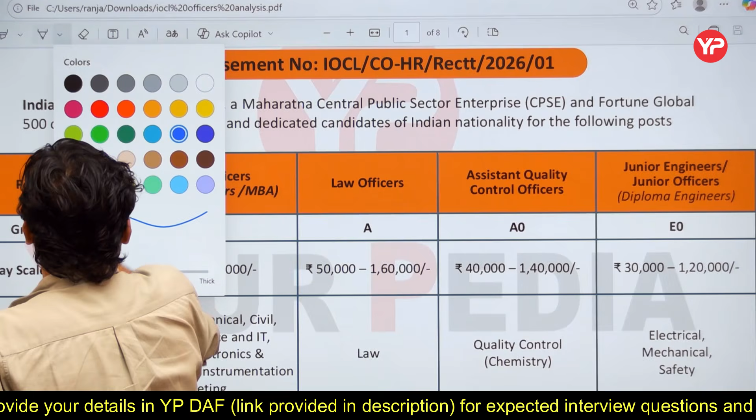I am getting one question a lot from various sources - WhatsApp, Telegram, Instagram, YouTube comment section. Sir, in the mechanical segment, what type of question can I expect in the officer post? For the officer post, I want to make sure this video is only for the officer post. I will make a separate video for the diploma level exam, that is the JEO post. So this video is dedicated to the engineer officer, the graduate engineer segment - that's what I will discuss here.

First question - hopefully most of the seats will be expected in the mechanical segment, so you have better chances this time, all of you have better chances. Last year there were more vacancies for chemical, but this time it's for mechanical. Could be, I think it could be.

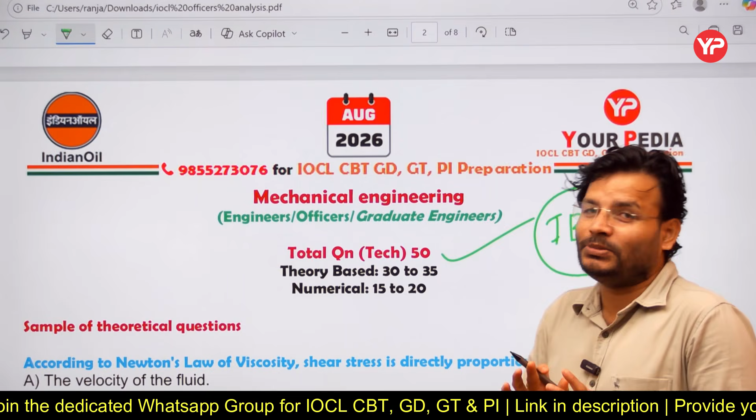I will give the list of 5 most important subjects for mechanical engineers that you have to deal with. So here you can see the total number of technical questions - there will be 50 questions. It is clearly mentioned 50 questions, out of which, talking about IBPS officer post, you can expect at least 15 to 20 numerical questions, and 30 to 35 theory-based questions.

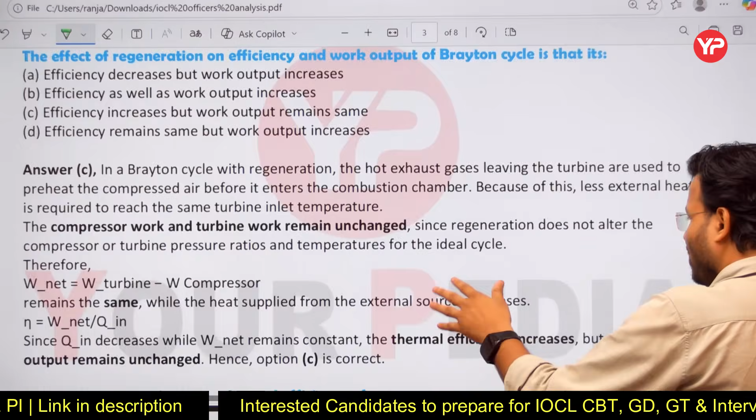Now a student can ask, sir, what kind of question comes in theory-based, and what type of question comes in numerical-based? That's why I have come here with some sample questions - some questions that have been asked before in the IOCL officer post. I have taken a few questions, and on that basis I will show what different types of questions they can frame on the numerical part as well as the theoretical part - I am going to show you all of this, how to do it.

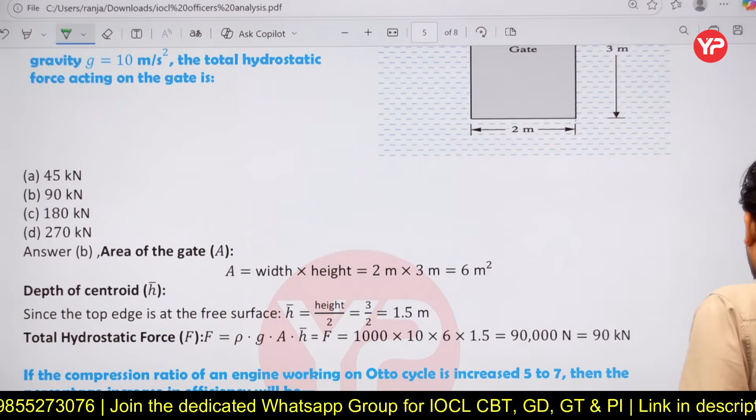And yes, since you have approximately 1.5 months left, how should you prepare for that exam, and most importantly, how can Yourpedia help you? So I am showing you all these questions - how they came in the HPCL officer exam, and how they can come in yours, right?

As I told you, 30 to 35 questions will be totally theoretical based, and 15 to 20 questions will be numerical.

Now the question is which type of theoretical questions they can ask. If you talk about the difficulty level of theoretical questions, that will be moderate to difficult, or some questions will be easy. Obviously out of 30-35 questions, you can expect 5 to 7 questions to be very easy. After that, moderate and tough questions will be there.

I am not talking about the numerical part here, I will talk about that separately. So here the theoretical question that comes under the category of easy question, like 'According to Newton's law of viscosity, shear stress is directly proportional to', and you have some options. This is an easy question, which you can see falls in the easy category.

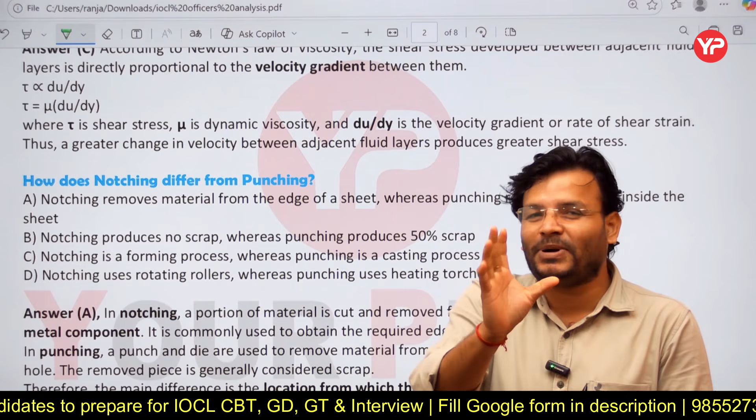Now yes, I have given the answer, I am not going to explain right now. That is another question: area under the TS diagram. That is again a very easy question. All the students can give the answer.

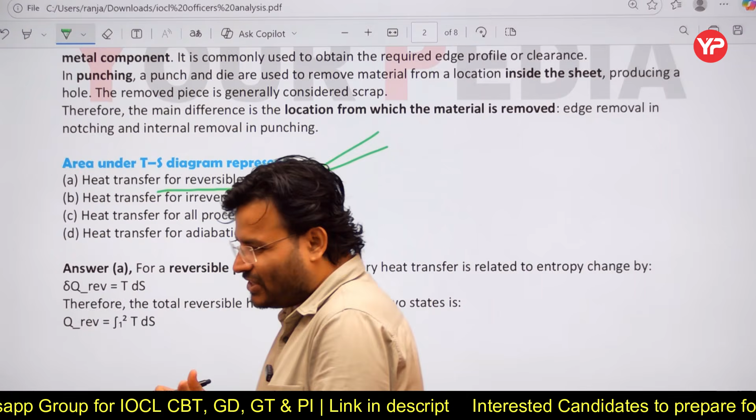Right, okay, I will come on that.

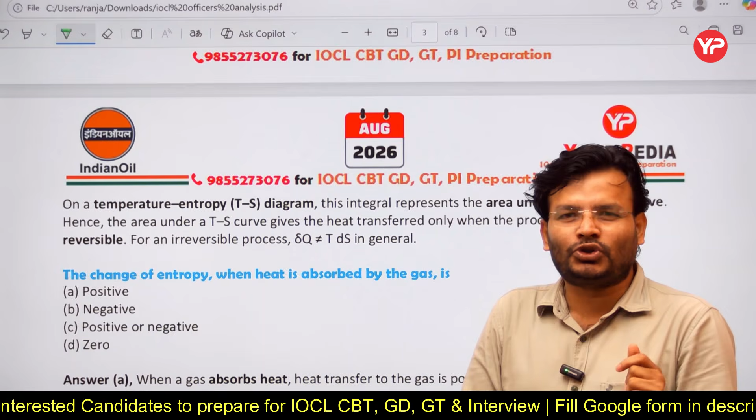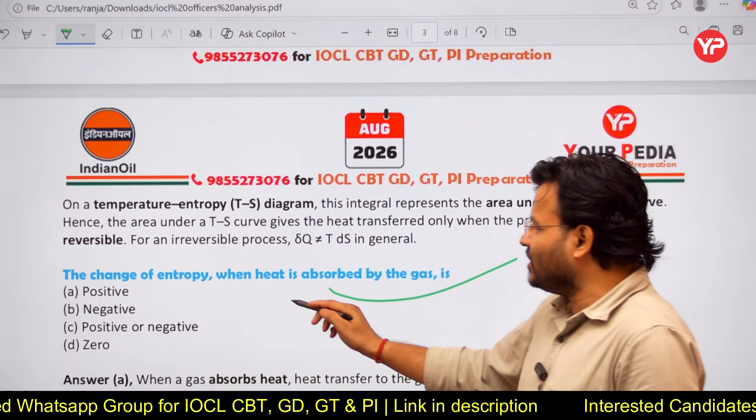This is the next question. The change in entropy when heat is absorbed by the gas. Simple question, that is another simple question we can say.

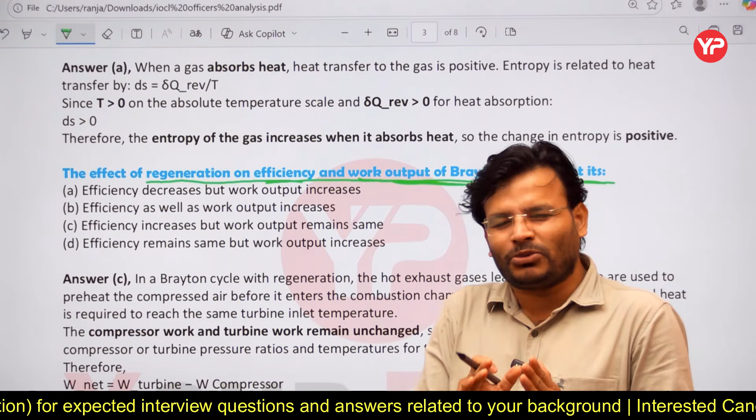So theoretical questions mostly we can see as easy to moderate, and yes, some tougher questions they may ask, some difficult, some light. Out of 35 questions you can expect 7 to 8 questions which will be very tough. Tougher means multiple concepts could be involved there, and you have to go much more deeper in the subject, right?

Here I have given, this is the next question.

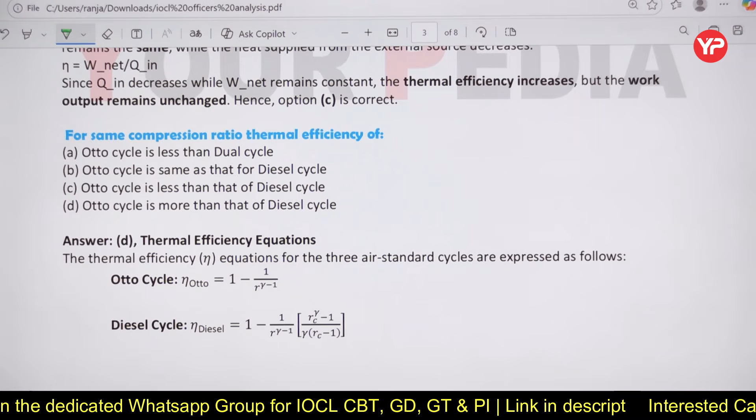For same compression ratio, the thermal efficiency, you have given some options, right? That is the kind of theoretical question you can expect. Now the question is the numerical type of question, and that plays a crucial role in your selection.

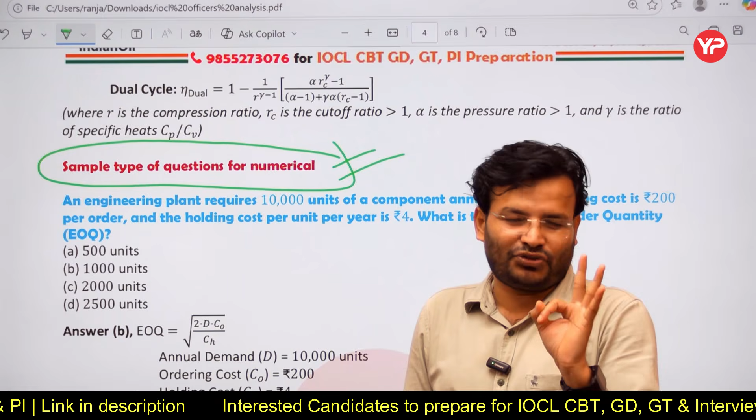So numerical segment can be of 3 types of questions they can frame. As I asked students, as I discussed with several students who appeared in the IOCL officer post, according to that I am going to give some conclusions here.

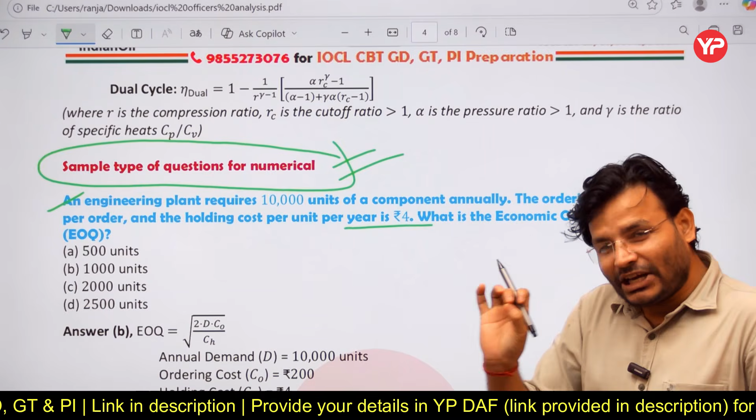One type of question, my dear friends, is like: an engineering plant required 10,000 units for a component annually, and the ordering cost is given and the holding cost is given. What is the economic order quantity? That is again numerical, but called easy numerical - you don't have to do anything, just substitute the value in the formula and you will be able to answer. That is an easy type numerical, and all of you can do it, I think.

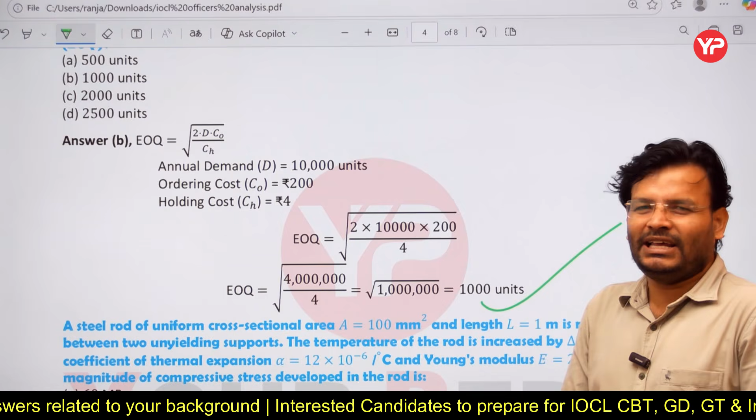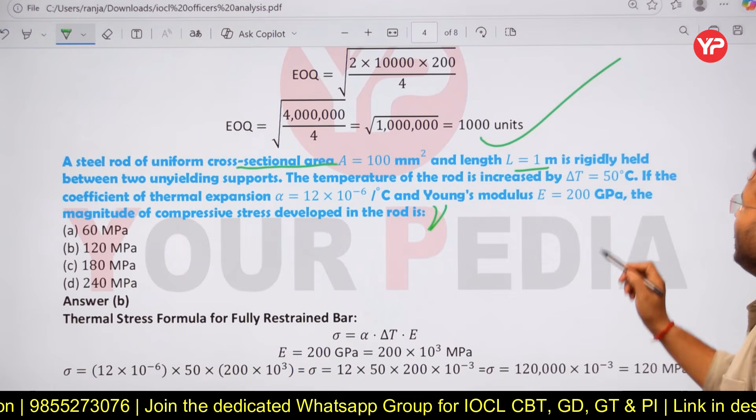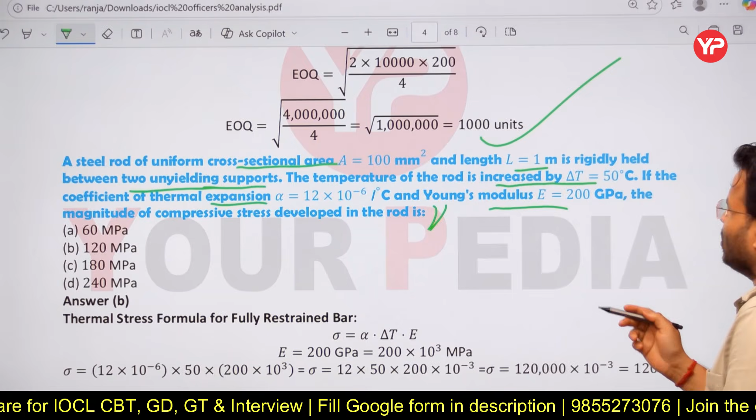Now if you talk about another type of question, that is again easy type. A steel rod of uniform cross-section area is given, length is given, is rigidly held between two unyielding supports. The temperature of the rod is increased by delta T. If the coefficient of thermal expansion alpha is known, Young's modulus of elasticity is known, the magnitude of compressive stress developed in the rod - thermal stress is E alpha delta T.

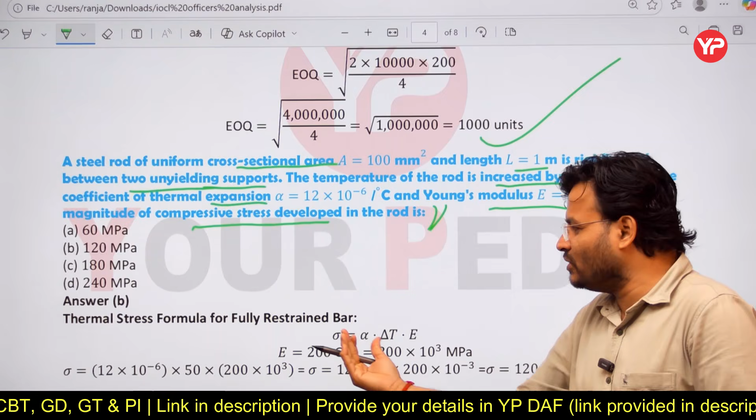Again that is an easy type of question, in which what you have to do is just put the given value in the formula, and with a little good calculation you will get the answer easily. By solving that we will get 120 here. Now come to another type of question.

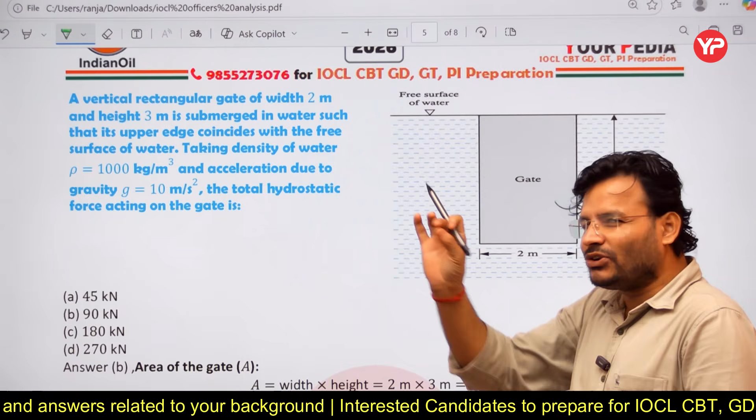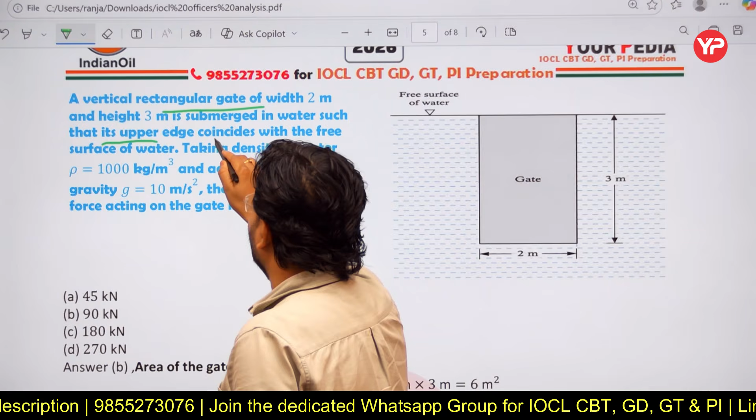This is again a question which comes under the category of easy to moderate. A vertical rectangular gate of width 2 meter and height 3 meter is submerged in water such that its upper edge coincides with the free surface of the water. Taking density of water as 1000 kg per meter cube, acceleration due to gravity given, the total hydrostatic force acting on the gate is rho g h bar - put the value and you will get the answer.

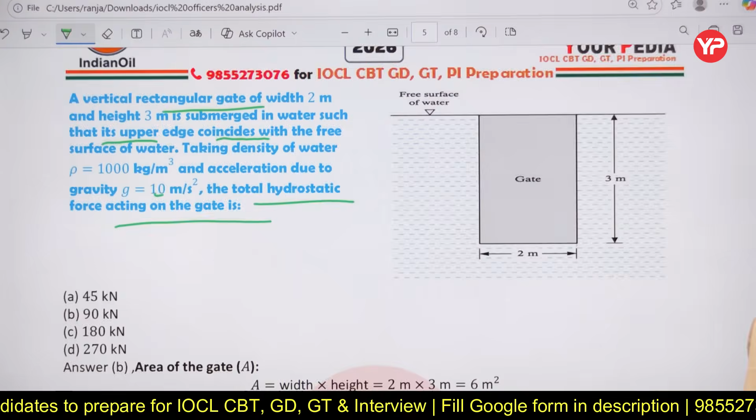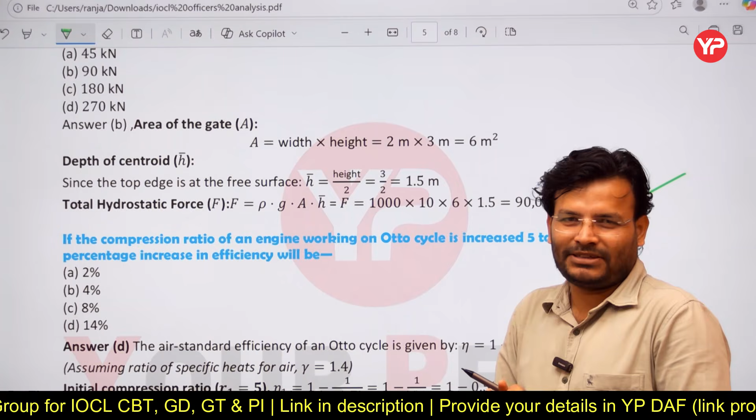So those were the few questions which have been asked by IOCL, based on memory - a little data could be changed, but the question language and everything was like that. Now come to another type of question, next type.

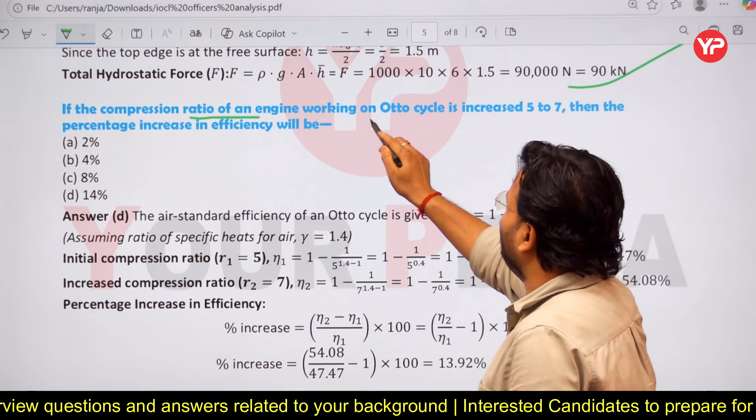What is the next type of question? Now see this question, my dear friends. In the compression, if the compression ratio of an engine working on Otto cycle is increased from 5 to 7, then what will be the percentage increase in the efficiency? Which type of question do you think this is, my dear friends?

I know you remember the efficiency formula for the Otto cycle - 1 minus 1 upon r to the power gamma minus 1. But now the question is, can you calculate 5 to the power 1.4 minus 1? So it becomes 1 minus 1 upon 5 to the power 0.4. Now tell me, do you think you are able to solve that value without a calculator? Obviously no, right? So it will be difficult.

Suppose in the numerical, if this value is not given here, then how are you able to solve that question? Obviously you will not be able to solve that type of question, right?

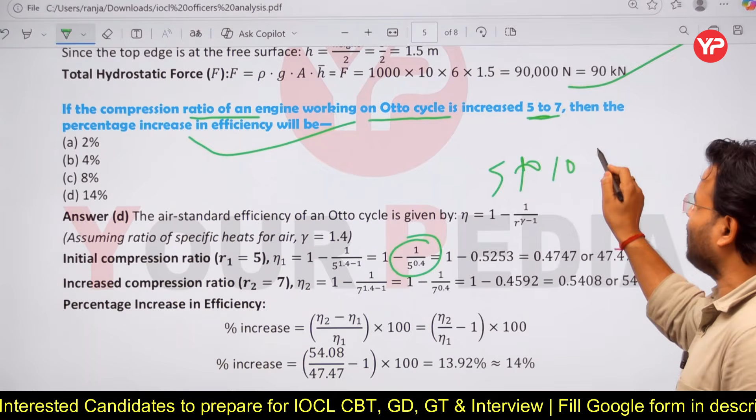What you have to do - I'm telling you that type of question is only 5 to 10% of questions coming like that. In that time, either you practice a lot or otherwise you can leave that type of question. 5 to the power 0.4 is very difficult to calculate, it will take a lot of time, so you can leave that question.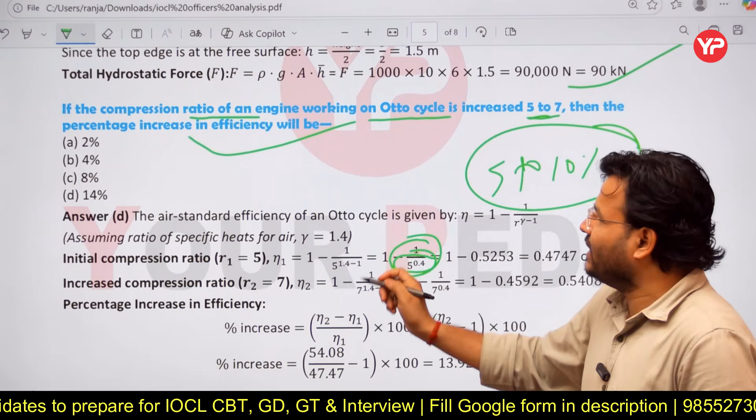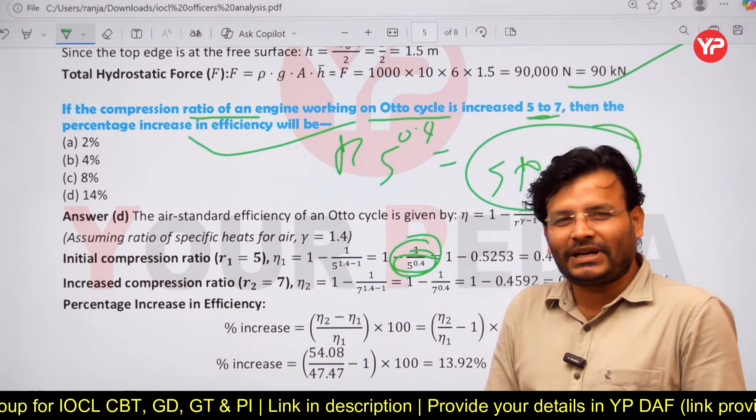How am I able to solve that question? Suppose in the data, if they give the value of 5 to the power 0.4, then I think it will be a little easier. Otherwise in that scenario, not even a single student can solve it. Okay, unless someone makes a lucky guess - that's different.

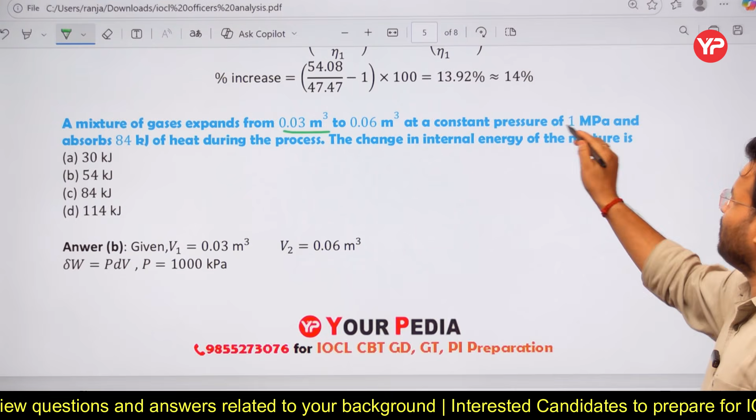Now see another question. A mixture of gas expands from 0.03 meter cube to 0.06 meter cube at a constant pressure of 1 megapascal, absorbing 84 kilojoule of heat during the process. Find the change in internal energy of the mixture. That is again an easy question - dq equals du plus dw. On that concept you have to solve it, and easily you are able to solve it. So just see, this is that type of easy question.

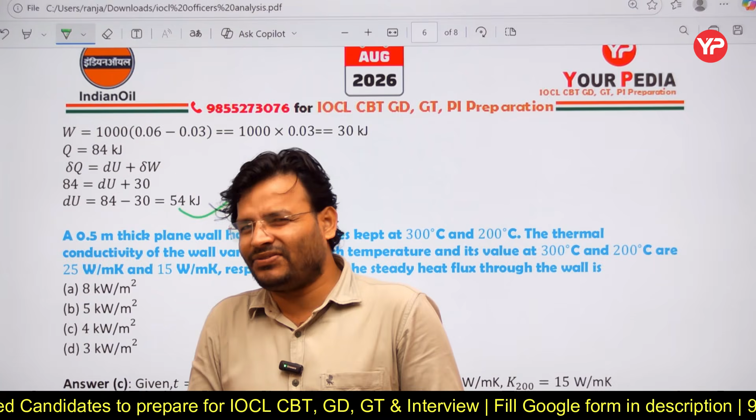So practice that type of question, and if some difficult question also comes, since I'm telling you, you have 1.5 months right now, so try to practice some difficult questions. Easy questions you are already able to solve, so try to solve some difficult questions.

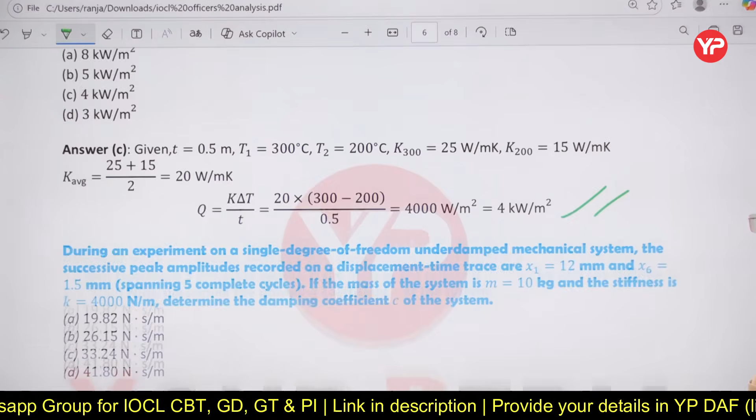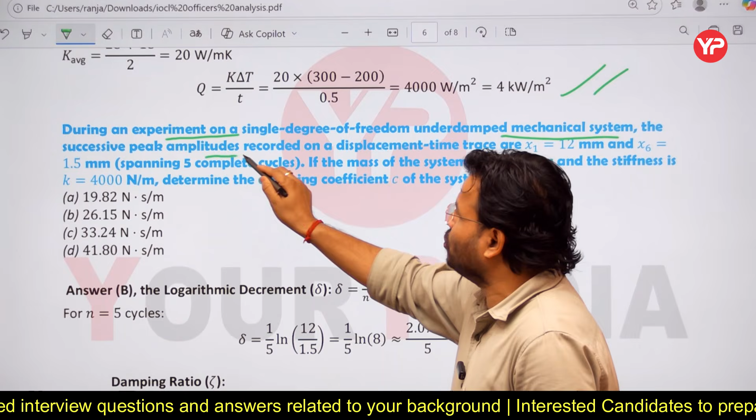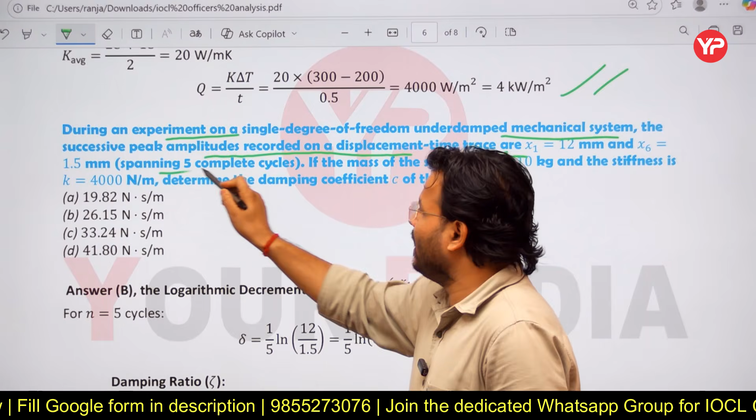Now see, there's another type of question that you can keep under the category of easy questions. This is a question from theory of machines. During an experiment of a single degree of freedom underdamped mechanical system, the successive peak amplitudes recorded on a displacement time trace: x1 is given as 12 mm, and x6 is given here as 1.5 mm. If the mass of the system is given, the stiffness is given, determine the damping coefficient of the system.

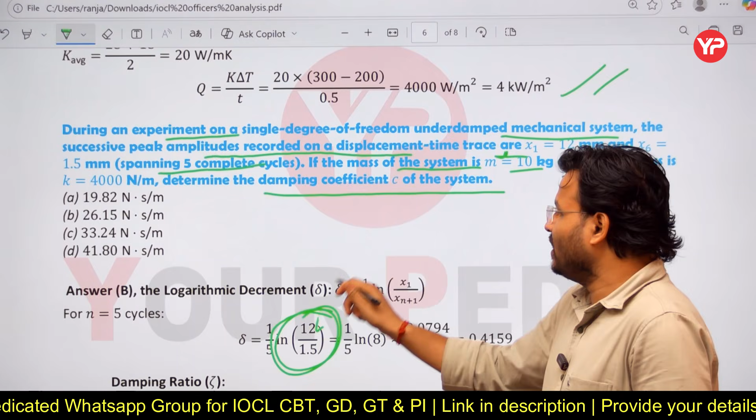In that case, my dear friends, logarithmic decrement is given: delta equals 1 upon n, ln of x1 upon xn plus 1. Now again, if the value of ln of 12 upon 1.5 is not known, how could you be able to solve it? That's why its value should be given in the question. If this value is given - ln 8 is given - then you are able to solve it. Otherwise, that's why I'm telling you one thing you can do.

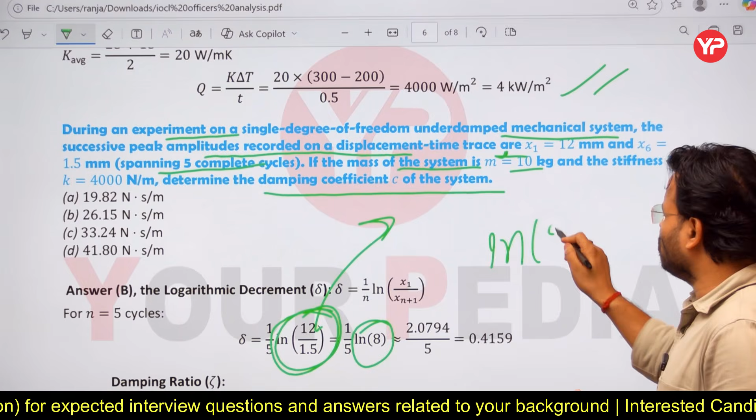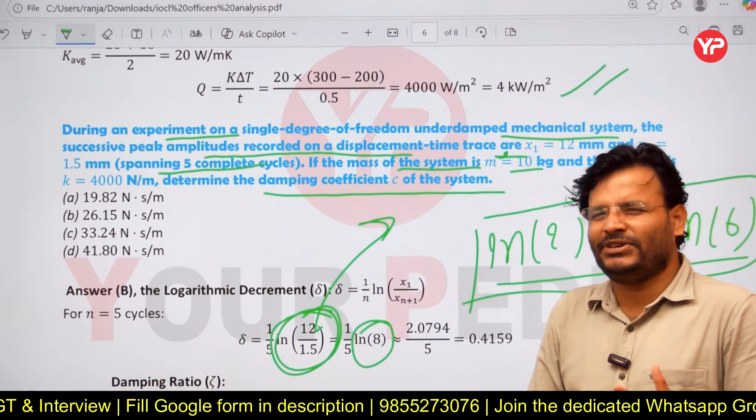Keep in mind - try to remember the values of ln 2 to ln 6, it will help you. They are directly going to ask that type of question. So if you have remembered those values of ln 2 to ln 6, I think it could help you a little bit in the exam, right? If you don't remember them, you cannot proceed after that.

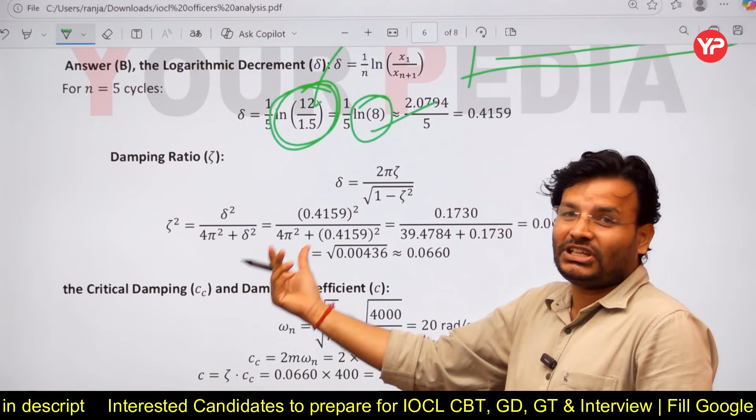After that, see how much calculation is there. Suppose if you have remembered that value, after that see how much calculation is there - without a calculator it will take at least, I think, 7 minutes, not less than that. 5 to 7 minutes they will consume for that type of question.

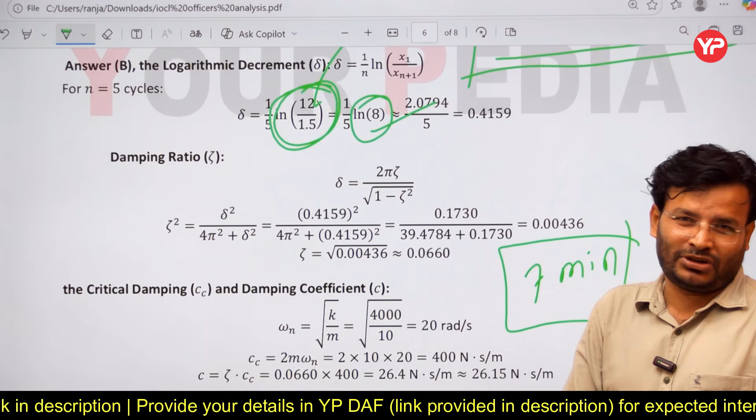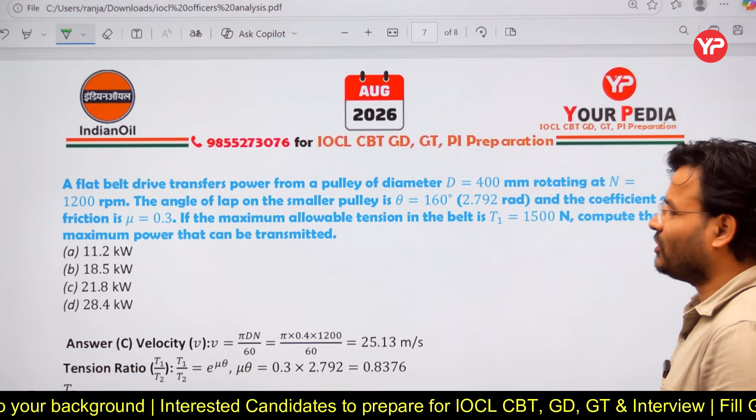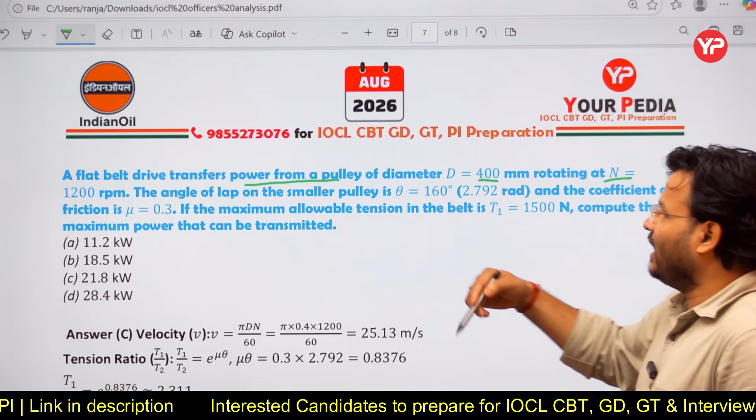So here again we can see that type of question. Here see in the question which type of question is there - a flat belt drive transfers power from a pulley of diameter d given, rotating at n given, angle of lap given as 160 degrees, and also given in the form of radians, and coefficient of friction is given. The maximum allowable tension in the belt is given, right.

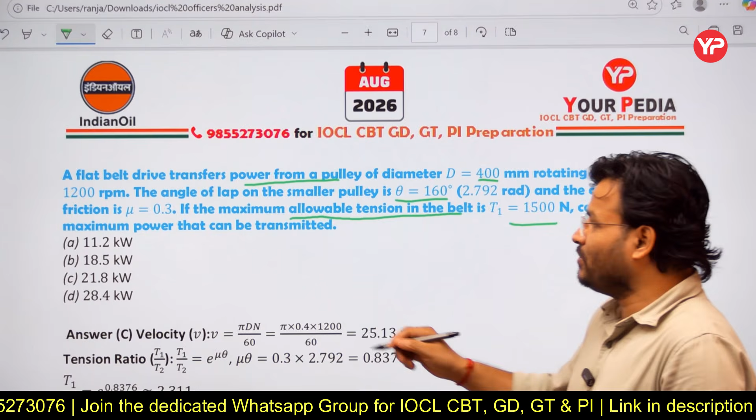Compute the maximum power that can be transmitted. Power is T1 minus T2 into v. So velocity you can calculate.

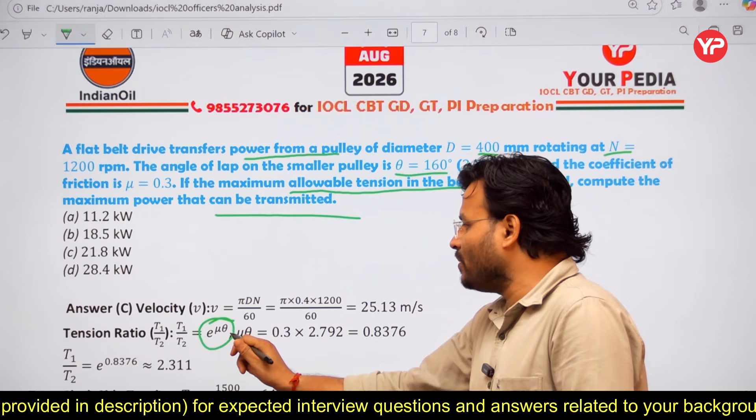Now see here, e to the power mu theta — if in the question the value of mu theta and e to the power mu theta is not known, you won't be able to solve that type of question. That's why its value should be given, it will be easy.

Here, my dear friends, is the third type of question. What is the third type of question? That you can solve in the exam. Here, whatever data is required is given in the question. That was a type of question where the data was given.

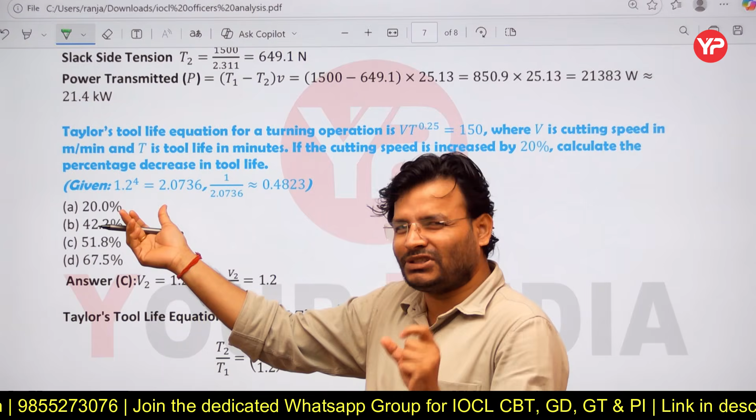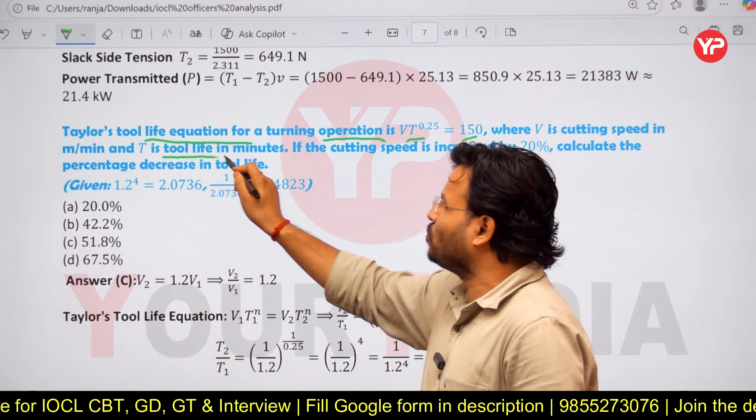Here we can see the Taylor tool life equation for a turning operation: V t to the power 0.25 equals 150, where V is cutting speed in meters per minute, T is the tool life in minutes. If the cutting speed is increased by 20%, calculate the percentage decrease in the tool life.

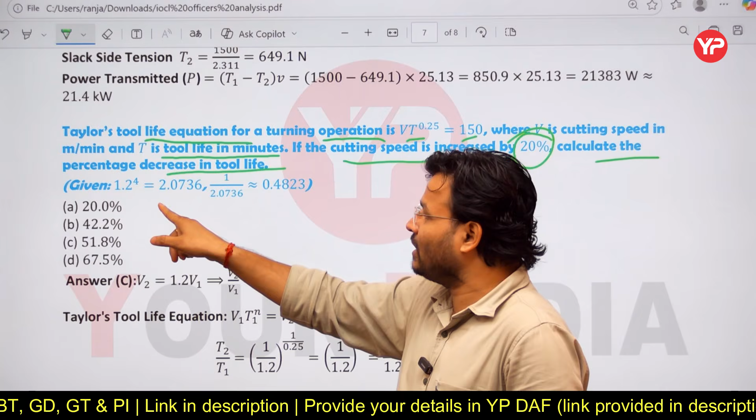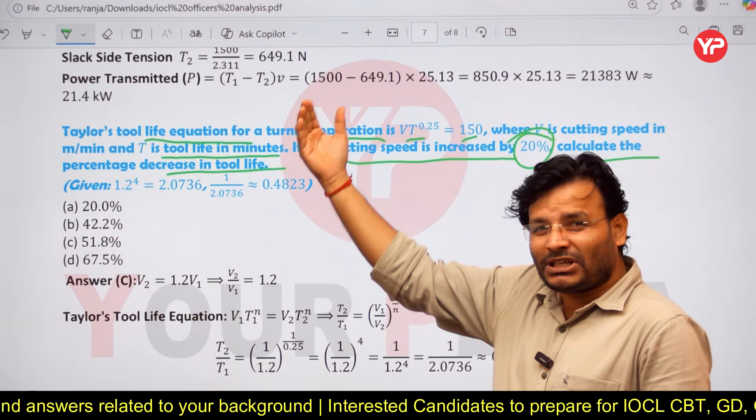Now here you can see clearly, 1.2 to the power 4 — you can take approximately 2, or exactly 2.0736, and 1 upon 2.0736, that value is given as 0.4823. Yes, that is an easy question, I can say. Not easy, but compared to other questions, that is solvable. You are able to solve it because whatever data is required is given there.

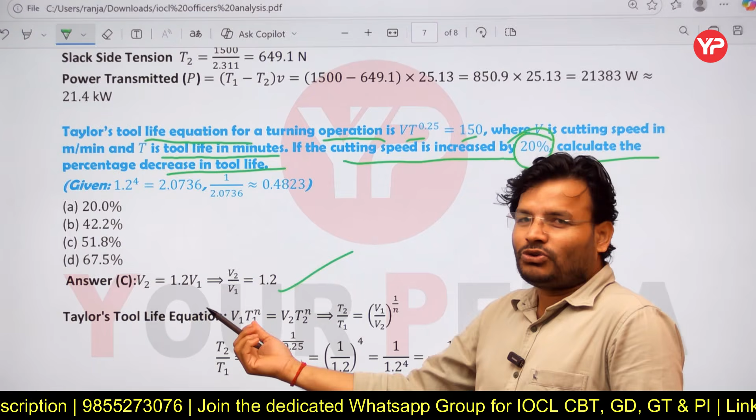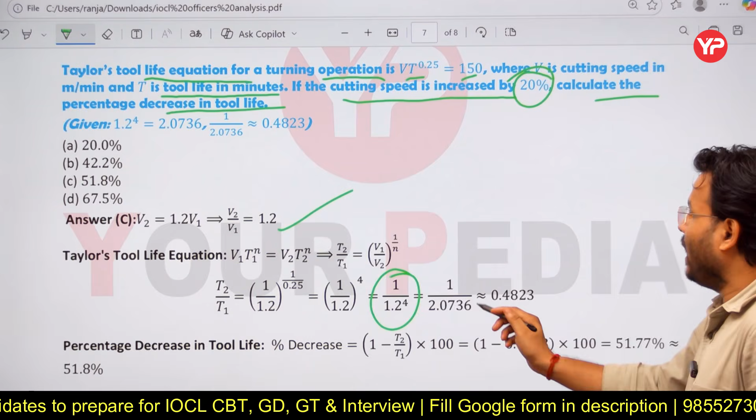So here we can say the Taylor tool life equation was V1 T1 to the power n equal to V2 T2 to the power n. By solving, the value comes out to be 1 upon 1.2 to the power 4. And in the question, that value is directly given. So it will be a little bit easier to solve. So that is the third type of question.

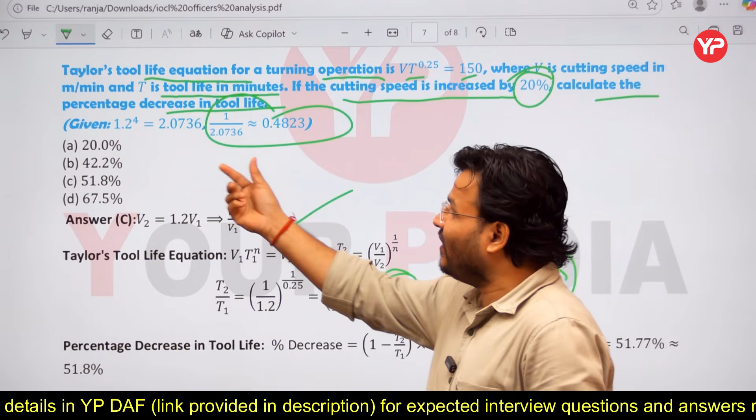So one type of numerical question is easy, directly formula based — substitute the value and get the answer. Another type has a little more calculation, but whatever complicated thing is there, its value will be given. It will take more time, but practice is needed for that type.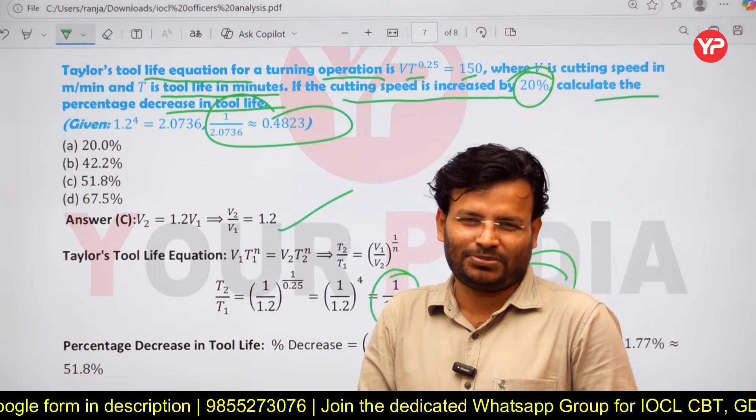The third type of question is one where ln or exponential terms are involved in the question and their value is not given. About 5% of questions will be of that type, and I suggest you try to solve that type right now, but in the exam you can leave that type of question, because it has been asked in IBPS earlier, and in HPCL too.

So practice on that type of question, dear. I will share questions in which the required data will be given. You have to practice that type of question and try to improve your speed or calculation speed, especially for the officer post.

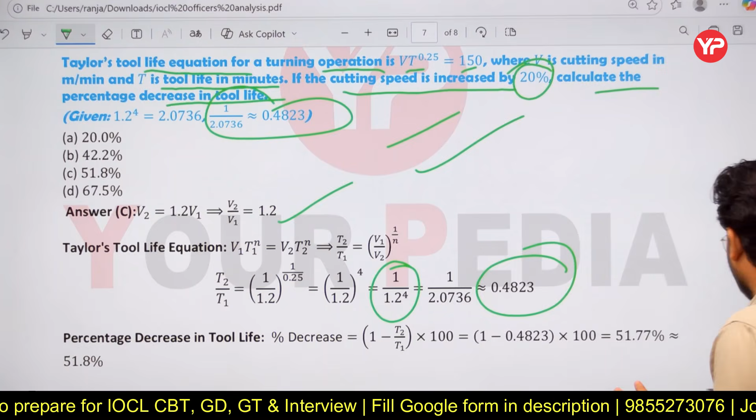That never means you should neglect the rest of the subjects. Yes, you have to study all subjects, but among these 5 subjects you have to focus more, right? And where will you get practice questions for all of that?